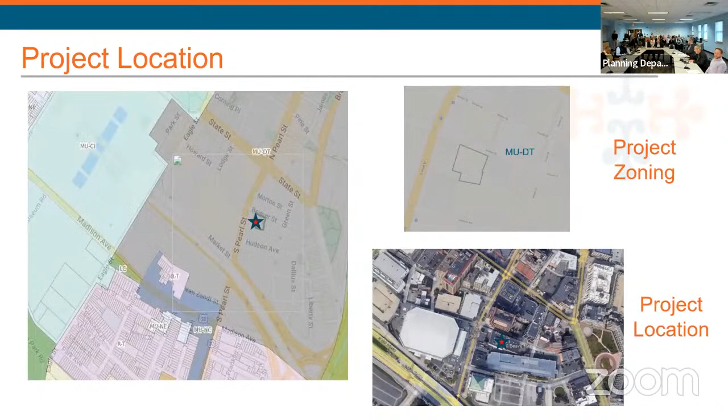And the board chair for this group is Susan Burkhead, who is also here. The target community of this school is the Capital Region, primarily Albany, Troy, Schenectady, and Waterford school districts, primarily because 72% of the disadvantaged students they're looking to serve come from those communities.

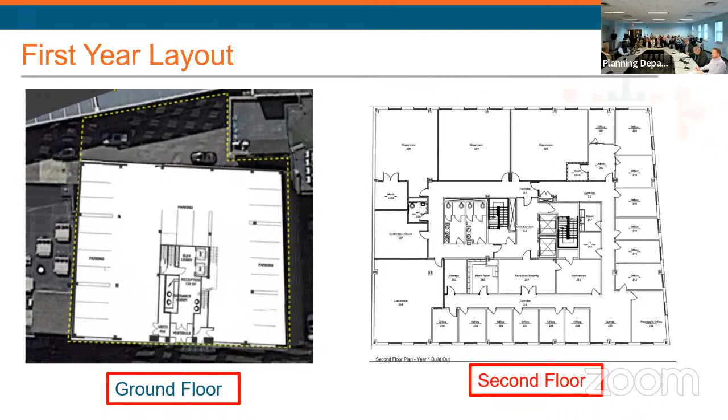In the first year, we'll occupy two floors, the second and third, with access, lobby, and parking on the ground floor. The second floor is primarily the operational and administration offices of the school, and classrooms. The first year is about six classrooms, and the space on the two floors slightly exceeds that.

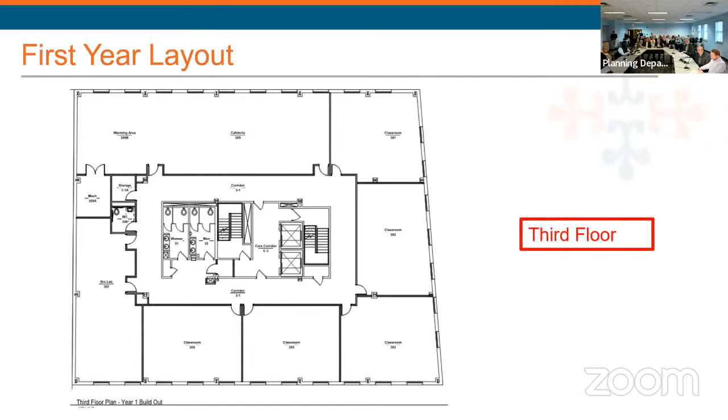Coming to the third floor, and then a full build-out by year four would include all of the floors of the building, including the fourth, fifth, and sixth. Typical of a high school, we have classrooms, some larger science spaces, as well as assembly spaces such as cafeterias and media spaces.

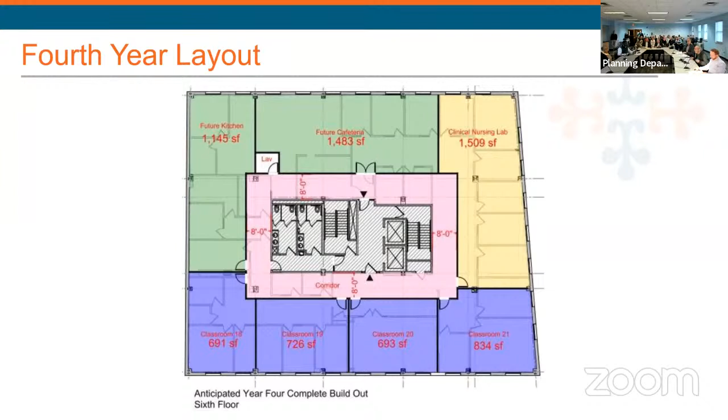Al asked a question about the drop-off of the students and traffic. They'll be arriving by CDTA buses, which don't stop down Beaver Street — they'll stop at a corner. Probably most people get off at the corner of State and Pearl and have to walk that distance to the school. If somebody drops off, they'll contend with exactly what everybody else does there.

They'll either pull in front of the building if there's a space, or if not, double park long enough to let the person out of the car and then go on. There won't be any need for parking — the parking underneath the building will be for the use of staff, so we don't want parents pulling in and taking those spaces. Those are meant for staff.

Along those lines of parking, is there enough space in the building for staff parking? At year four, no. In the first and second year it's maybe close, but by the third and fourth year there aren't enough spots — though there are other parking spaces available that can be made available to staff, mostly for pay.

Will students have to pay for their CDTA trips? No, the school district is obligated to pay for them to travel to school. School districts that don't have CDTA would actually have to provide a vehicle to take them there. So if a student applies and gets in from Westerlo or Guilderland or Berne, someplace like that, they'll come in on probably a station wagon or a small van or a small bus from those areas. They sometimes travel to 2 or 3 different schools, since there might be 1 or 2 students enrolled at different schools, and those vehicles will have to drop the students off.

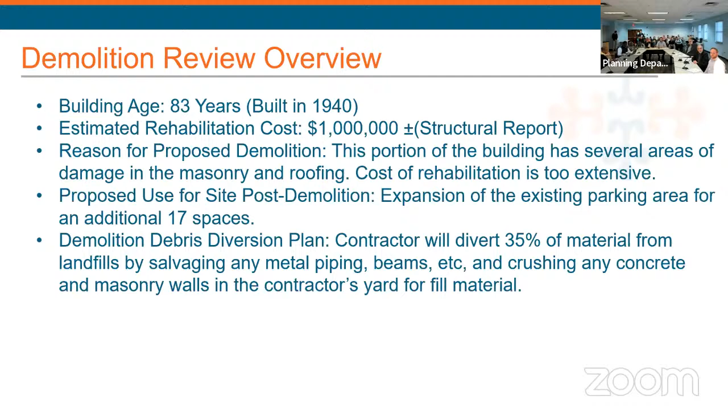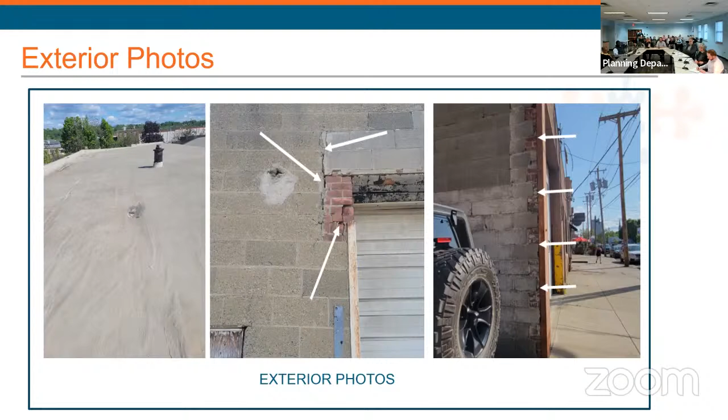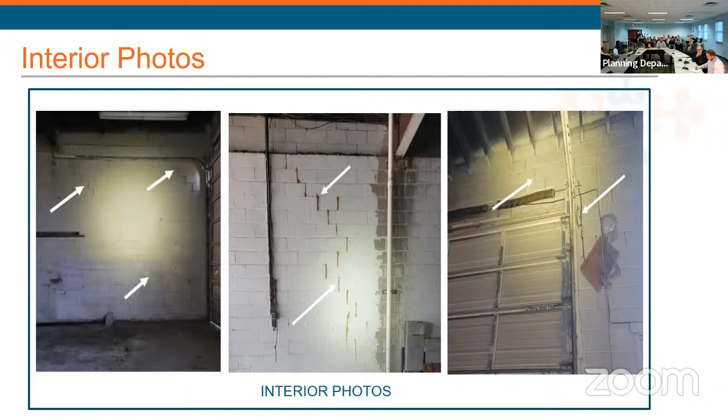Just some more interior photos showing the extent of cracking within the masonry on the inside, and it's consistent along the exterior walls as well. That further identifies the extent of the building that we're proposing to demolish.

Originally, with the existing parking lot, cars don't have enough room—it's very tight to maneuver within that parking lot, so they go through the alley. But given the current condition of the alley, we would prefer to see cars exit out on Broadway.

From a legal standpoint, we are going to propose an easement for ingress and egress for 897 Broadway with that adjoining parking lot.

Another item is that the parking spaces on the neighboring lot—when the 897 building is open, the spaces on the adjoining lot will be available for use of that building. The owner of 897 Broadway and the neighboring building is the same owner, so he's putting that in a contract to have that availability for parking.

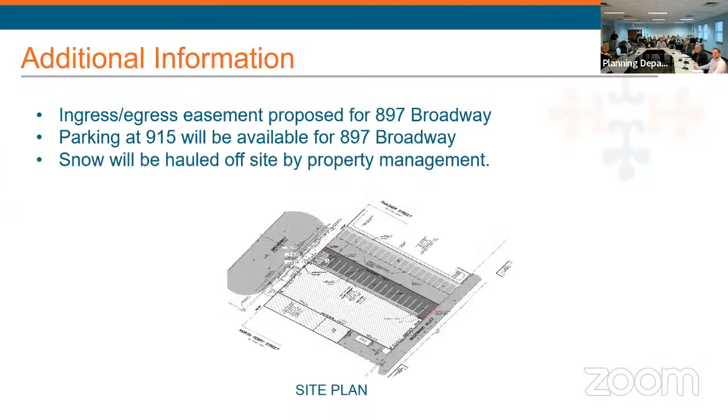Yep, so Jasmine, can you go back to the site plan please? Right adjoining to that proposed handicap space, we provided some shrubs there for screening of that new parking lot. It's also within the code to provide some street trees, so we'll be providing street trees as well, along with some bike racks along the street and some other possible street furniture.

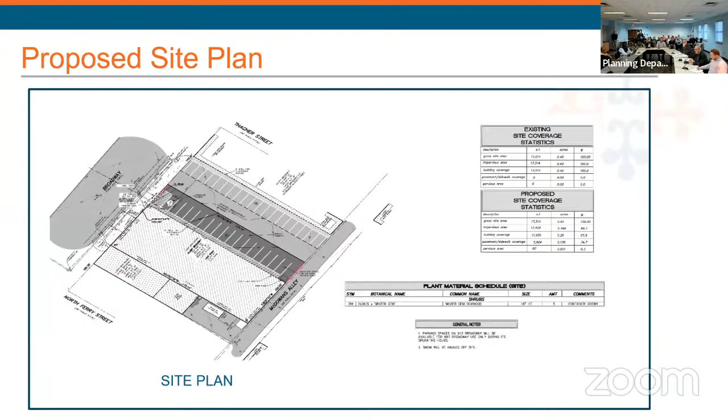Do we have any elevations to show? Okay, I just wanted to mention to the board, I had initially been against tearing this structure down, but there are two things that convinced me. The first is that this isn't really a building attached to the building where they have the bar and restaurant—it's actually sitting there separate, being held up by a bunch of I-beams. The only place that's really attached to the existing building is the roof flashing against the neighboring roof.

The second thing is that I was concerned about the continuity of the facade and how it reads on the street. And when I looked at it, there's a door and a window within a large garage door, which negates what would be a smooth look, even if the facade could be saved. It doesn't make sense because about half the front is occupied by this very large garage door. So just so the planning board knows that—and of course, you can go and take a look at it yourself.

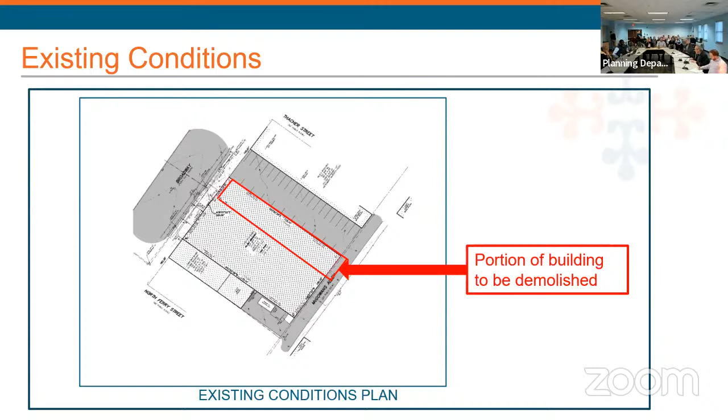Any other questions? Chris? To be clear, I'm looking at this on Google Maps. It's Wolff's Biergarten, and it's the entirety of what looks like a one-story building that's knocked down, the whole thing?

No, only a portion of that building will be knocked down. A portion from the parking lot, if you continue down Wolf's toward 9th, you have that parking lot right there between the office building. It's a portion of that building next to Wolf's, starting from the parking lot, heading back toward Wolf's, but not the entirety. The chairman described it properly. It's like an add-on to the existing building. It was meant to expand the building and put an enclosed space in, so we're demolishing all of a one-story addition to an existing one-story building, but not the rest of it.

It must be the stuff with the white windows and white door. Yes, that's gone, that piece there. Oh, there we go. All right.

Is the lot for public use, or for residential to the north? So that's currently an office building, used for the tenants or employees of that office space now. So the goal is that the owner who owns the office building is also the owner of this new building. He's trying to share the parking so that both businesses, or 897 Broadway, has enough parking during their peak hours. So it's not public parking? No, it's not.

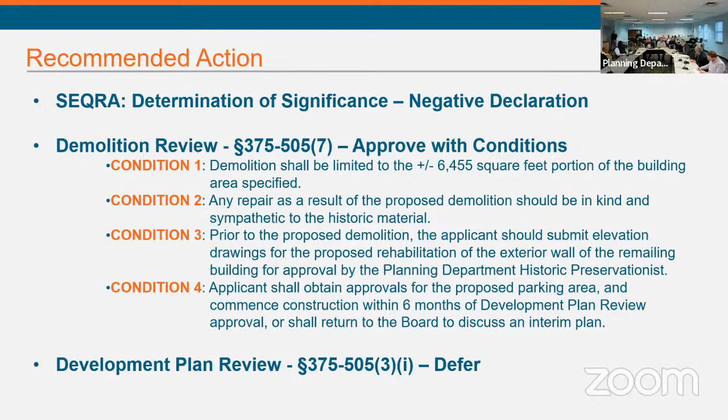Okay, further discussion. All those in favor, please say aye. Aye. Okay, thank you very much. That's a unanimous vote, and we look forward to the development.

The next item on the agenda is 102 Hackett Boulevard. Once again, Mr. Hirschberg is here working very hard. This is a mixed-use neighborhood edge development at 102 Hackett Boulevard.

The action under consideration is the State Environmental Quality Review Act determination of significance. This is the first time we've seen this project. You're probably all familiar with it. It is right now the headquarters of the union that represents correction officers, the one with that large sign that flashes all kinds of stuff. They're moving apparently, and the proposal here is to turn this into apartments.

Mr. Hirschberg. Nick Daniels for Hirschberg, and Hirschberg is going to take it over. Okay, Mr. Daniels, thank you.

As Chris mentioned, it's the existing NYSCOPBA building, and the goal is to convert this into 25 dwelling unit apartments. Located on Hackett Boulevard, across the street is the Albany Academy School for Girls, and further down the street is Albany Academy School for Boys. It's in the MU neighborhood edge district. Next slide, please.

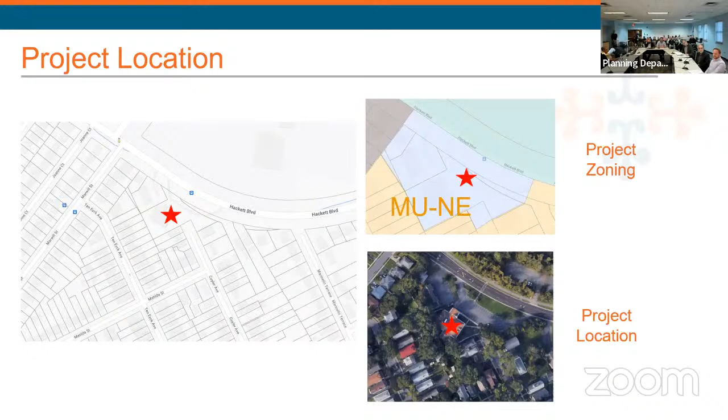As far as the site plan, the goal here is to not add or change the existing conditions very significantly. We are providing some new street trees along the street, and we worked with the city forester to provide the correct species.

As far as parking goes, we have ample parking. The goal here is to try to keep as many spaces as possible, but if need be, we can work with losing some spaces if needed.

There's existing lighting within the site, with many wall packs on the buildings and a couple of light poles. Moving forward, we'll provide some new lighting plans showing downward lighting, just to analyze the site and make sure we're not shining any light onto the neighbors' properties.

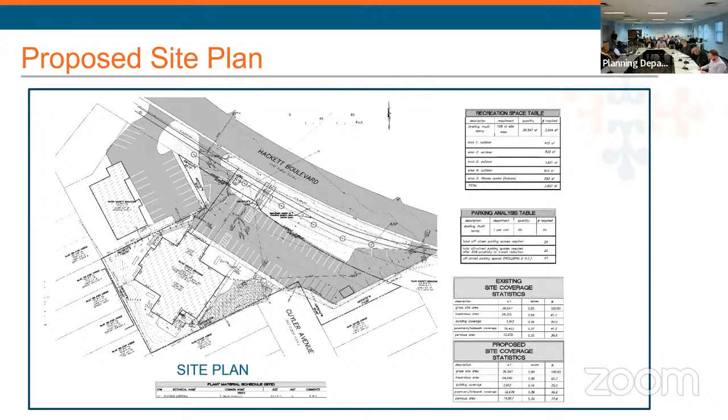Next slide, please. As part of the residential use here, we provide some outdoor recreation spaces - picnic tables, grills, garden beds - and also there's an indoor fitness area inside the building. So ideally, the goal here is to keep the existing site pretty much as is, and just add some new features to accommodate the residential use.

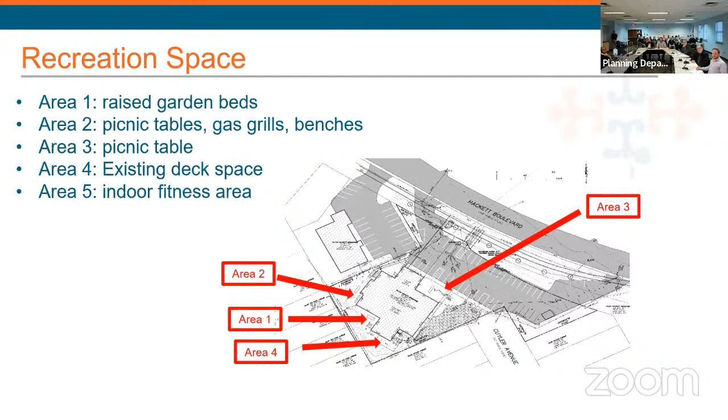And I believe that's the last slide, so I can open it up for any questions we have. Okay, questions from the board?

Will the driveways remain the same, or did you mention that? When we received some comments back from planning, we would like to keep the driveways at the existing dimensions as is - that's the waiver we'll be requesting. Currently it's used as one-way in, one-way out, so we have no problem keeping it that way. We would like to keep it that way, possibly adding some signage just for further direction so people don't make the wrong turn, but yes, we would like to keep it as is.

Is there no conflict with the next driveway being so relatively close? No, we don't believe so. There's enough separation for the next driveway, so we don't see any issues there.

I'm assuming one of the requirements is going to be some kind of signalization to get residents across the street to the parking area that's across Hackett Boulevard. So we're not intending to use that parking area across the street - we believe we have ample parking within the site.

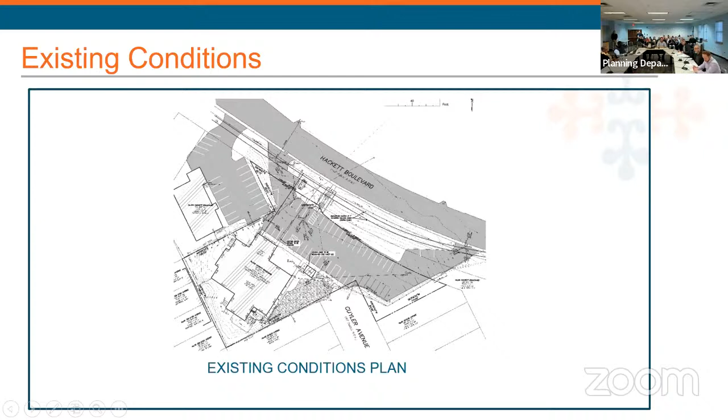Is there anybody to speak? All right, then we'll move to the staff recommendations, and again, we're only looking at SEQR today.

This is an unlisted action. We have received comments or recommendations from the Albany County Planning Board. We are awaiting some responses from other departments for their review. As the applicant stated, there's an existing parking lot that includes 51 spaces that would be utilized. There's a new water service being proposed to accommodate the change of use. Departmental comments have been shared with the applicant, and it seems like they'll be submitting updated plans.

Per the code for a dwelling multi-unit use, any multi-unit dwelling containing more than 20 units should include outdoor and indoor passive or active recreation spaces totaling at least 60% of the site area, which it seems they're proposing. We have a recommended action. Any comments to the staff, questions?

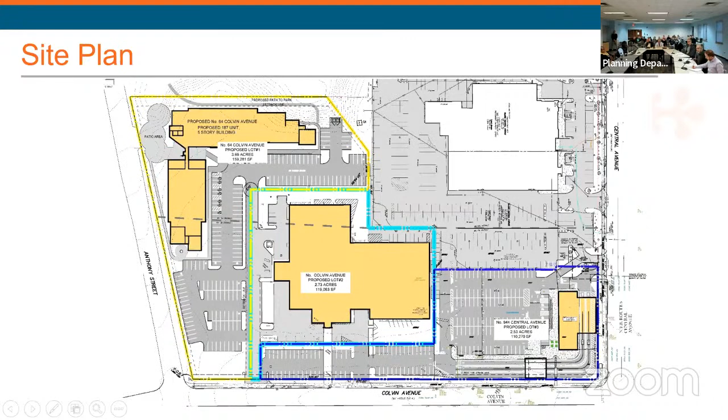Okay, I believe we have two speakers. We do, we have Common Council member Hyde Clarke.